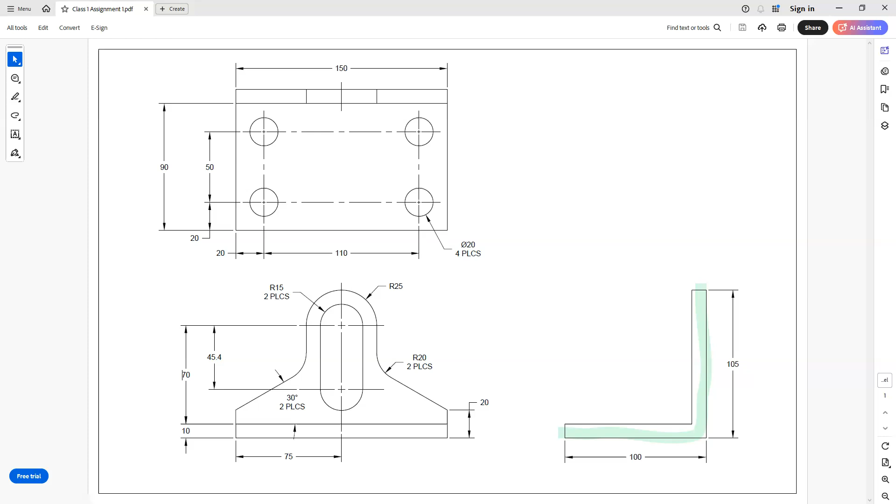Let's go ahead and change that to a yellow. But I'm going to create that whole entire shape there, and what that's going to do is leave me with having to remove basically a part of this, right?

And you can see this part that I'm tracing here. I'm going to have to come up with a way of removing that from here, and I'm going to have to do that on both sides. From most other programs, we're thinking mirror in order to do that, or we can create that sketch twice.

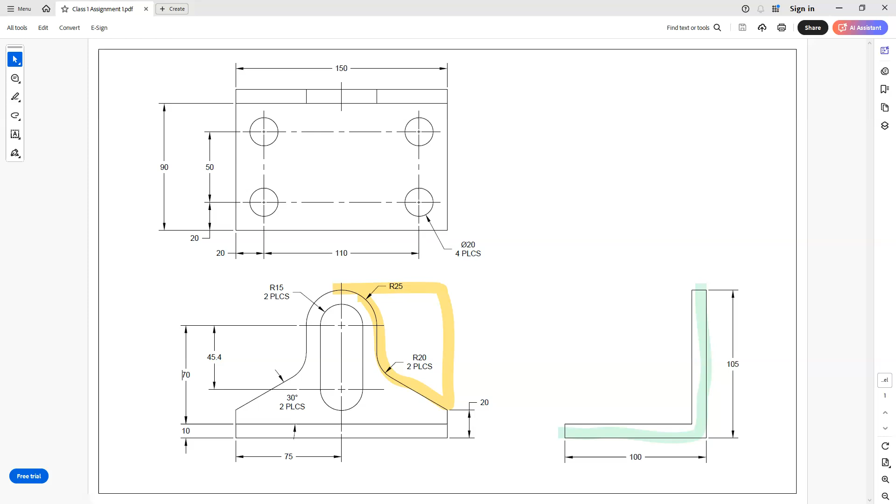So that's going to be one method that I'm going to do it. The second method that I'm going to do is I'm going to go ahead and take a look at this and say, hey, I already see that I can create this part here and just kind of stop it right here at this number.

So in the second half of the video, I'm going to create it using this method, and then I'm going to create this back half on top of it. So we're going to take a look at both different approaches.

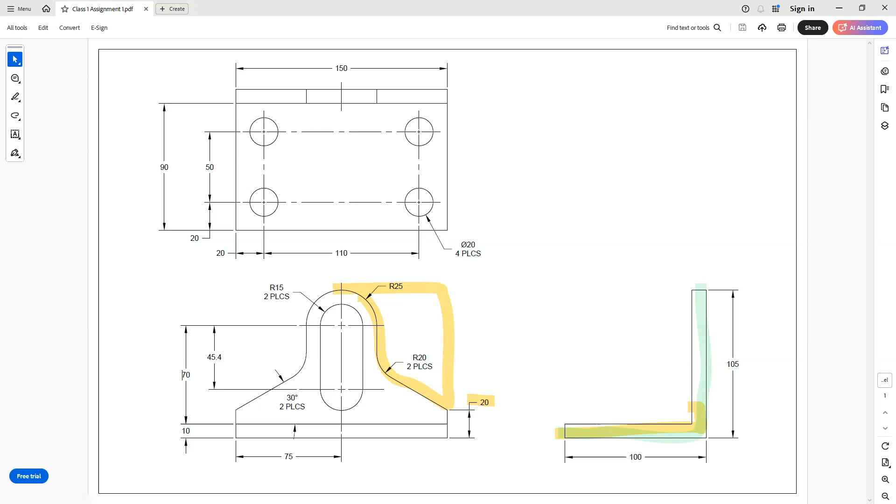Hopefully this shouldn't take us too long. It's just a couple of simple extrusions, but we'll walk through it here in Solidworks, and you can kind of see which one of these methods you would think of, or use to still create the exact same part. So let's jump over to Solidworks now.

Okay, so here in Solidworks, what I typically do is I'll usually click on the new button here, and then I'll go ahead and select a part. So I'm just going to go ahead and tell it that I want to create a part, and then I'll hit OK. Now with this, we do have to define what our units of measurement is going to be.

If you saw me do any of the Inventor videos, or if you're going to go take a look at that video, you're going to have to select what unit of measurement you're going to do before you get started. Here, I can select it after I get started.

Now I can also do that in Inventor as well, but in Inventor it kind of tells you to start off using millimeters or start off using inches, and here it's going to typically use the last units that you did before, but it's really super easy to change, and you're going to see that here in a second whenever it loads up and gets ready to work.

All right, so some of the normal stuff that you're going to see in both of these programs, or in any of the 3D programs, is you're going to have some kind of browser, which is located here. And you're going to have a ribbon along the top that's going to give you all of your commands and features and things of that nature to do. They all work exactly the same.

You're going to create a sketch, and then you're going to do something with that sketch. That's what you're going to see here in SolidWorks, no different than using Inventor. If you're using NX, exactly the same thing, or Creo is another program where you can see that as well.

If you wanted to change the units of measurement, or want to verify that the unit of measurement is the one you want, it's going to be here at the bottom, and from here you can select either millimeters, inches, or whatever you decide to use. In my case, I'm going to be using millimeters, grams, and seconds as my units for this.

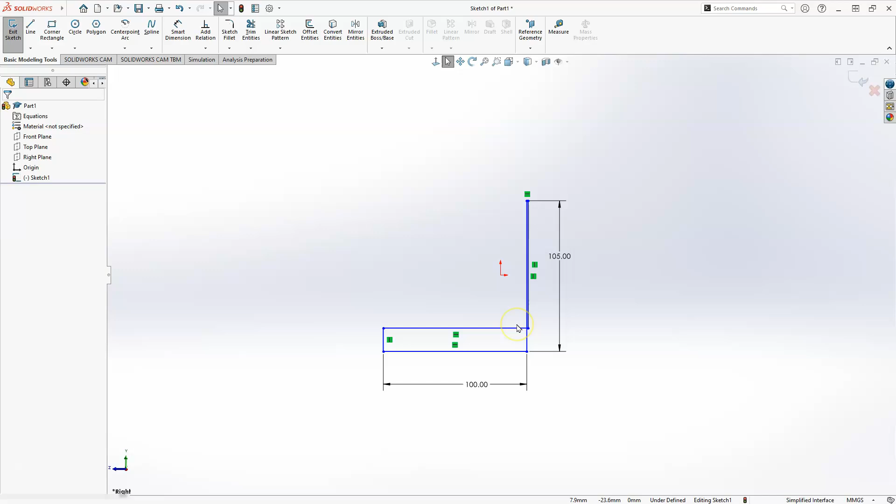So now you see that sometimes this will go a little weird on you. What I want you to do, if this does happen, is just grab this line. I'm going to left click and hold it, and then I'm just going to drag it to the other side here.

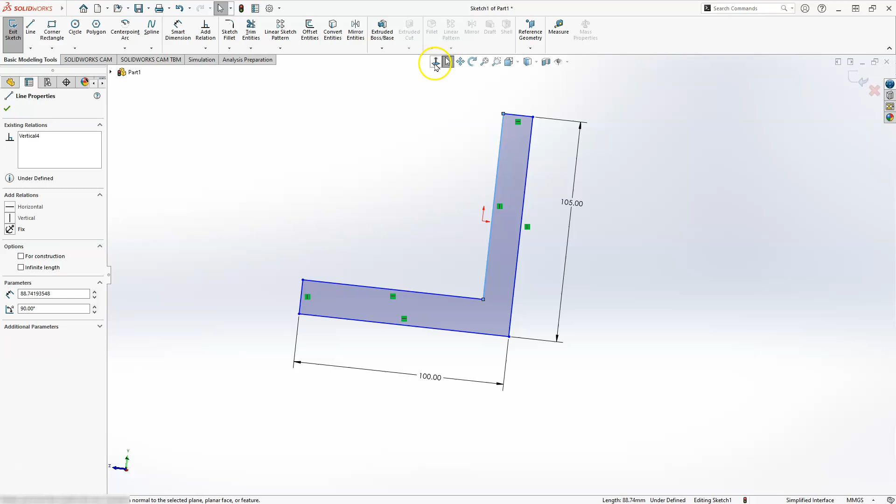Okay, let's go ahead and move this around a little bit. You can see that I was going to pan this over and I accidentally hit the middle mouse wheel button here. Another thing that you can do to get this back to the right orientation is go ahead and select the normal, and that's going to straighten it back out.

Okay, I have to do a couple more things here. I know that this distance here is going to be 10, right? So both of these two distances should be 10. Now I can set those two equal to each other, and the way that you're going to do that is...

Make sure that you're not in any command, so I'm hitting escape. I'll go ahead and select this line, hold down the shift button, and then I'll come and select this line. Once I select that line and stay on it for a little bit, you'll get some options here, so I can just tell it to make it equal. If this little box does not appear fast enough or it deletes, you'll still have those same options located here on the side. So if I select the equal here, it's going to set both of those equal to each other.

And I'll go back to my smart dimensioning. I'll select this line here, come to the side, do a left click, and then I'll type in the distance that I need this to be, which in our case is going to be 10.

All right, we just need a couple more things to put on here. Let's go ahead and hit escape. And what I mean by that is I want this line here, or this point, to be in line with the midpoint of this line, right?

So once again, make sure that you're not in any commands. I'm going to left click on that point, hold down the shift button, and then I'm going to come over here to this line until I find that midpoint. Once it highlights, you'll see I get the icon. Do a left click on that line. You can let go of the shift button. Remember, you're going to get that little icon to appear.

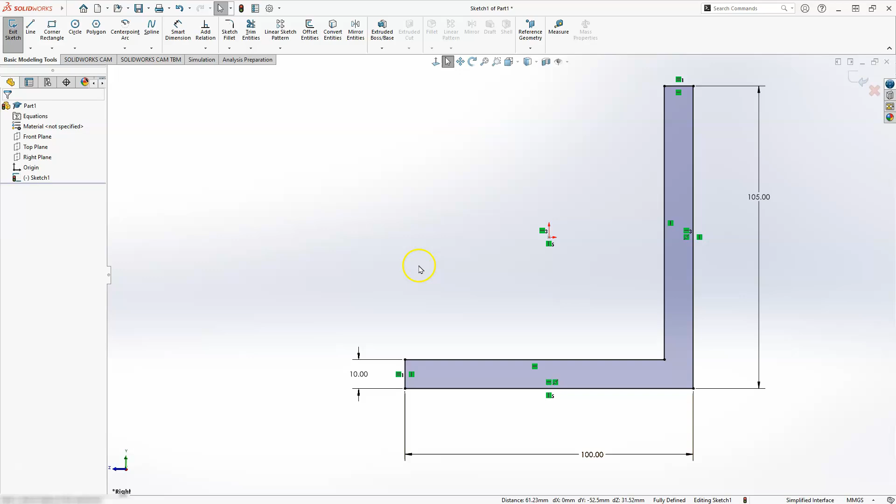And now if I look down here at the bottom, it says that it is fully defined, so my sketch is actually done and it's ready. At this point, I can either add some more stuff if I was doing more sketching, or you can do a right click and tell it that you want to exit the sketch function.

So you can either do it here or you can select here, either one is the same. So I hit exit the sketch. Once it's done, you can see my part. I'm just going to kind of give it a little rotation.

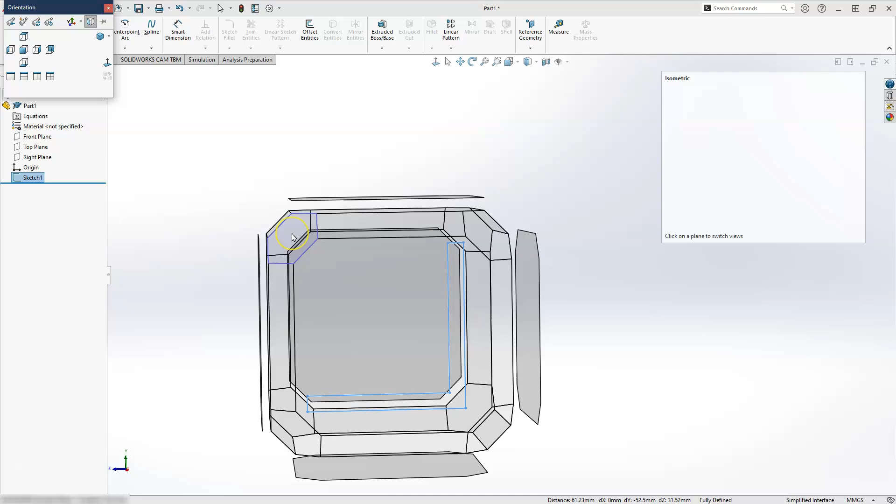Now another thing that you can do is you can also click the space bar. It's going to bring open this plane window here, and then I can select on this isometric here, right? So it'll rotate my shape in an isometric view.

And then from here, I'm going to extrude it, right? So I'm going to go to extrude, base, boss. I'm going to select here.

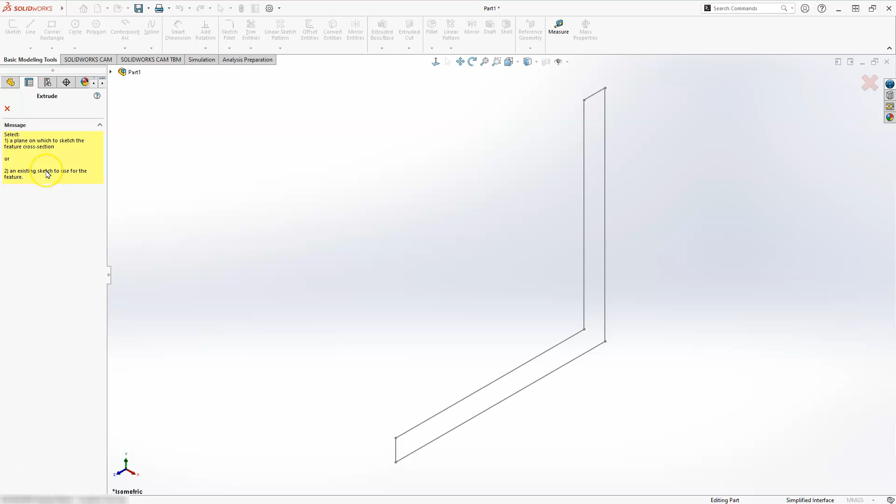Now it's asking me to select a plane or feature. Well, I have this sketch here. So once I select this sketch, SolidWorks should be able to find this and see that it is a closed sketch and say, that's what you want to extrude. Then I have to give it some characteristics of how I want this sketch to behave.

Do I want it to go in this direction, blind at a distance? I can add a second direction if I want it to go asymmetric, or if we want it to go symmetrically, there's a mid-plane option here, which is the one I'm going to choose. Then I'll give it the distance or depth, which in our case is going to be 150.

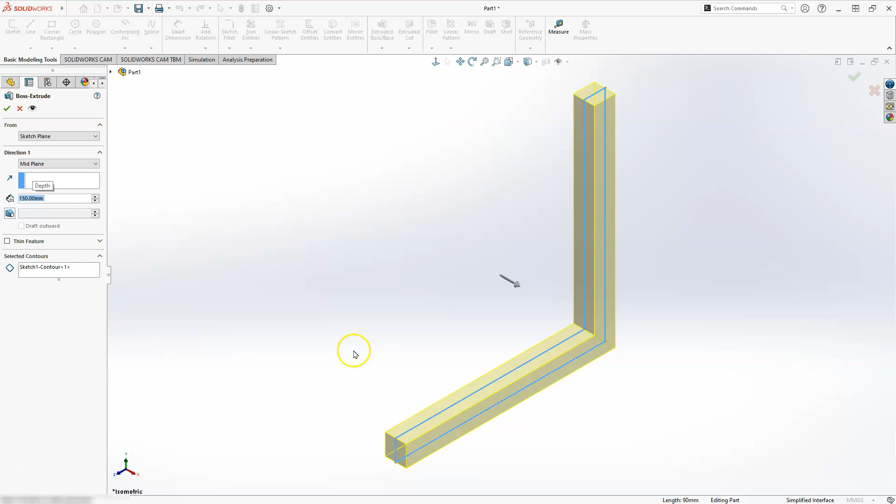Once I type that in, you should start seeing some kind of preview happening on my screen. If that's not the case, go ahead and hit enter, then it'll pop it up. Then we can either hit the check or OK here, or I can right click and do OK. All right, so there's my first piece that I've created with this.

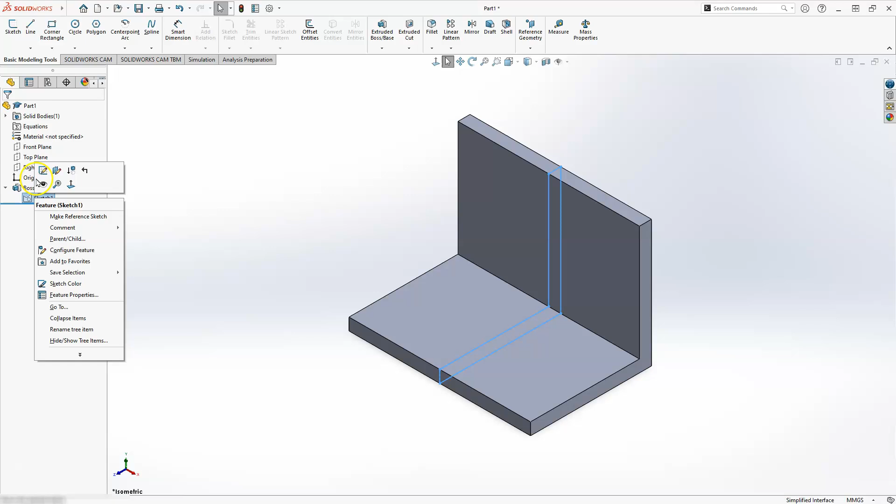I'm just going to do a left click anywhere on the screen, and that should get rid of or hide that sketch. If I wanted to edit that sketch, remember this applies to most 3D programs you'll use - that sketch still exists underneath. So we can always select this sketch, right click on it, and edit the sketch, which takes me back to where I can make changes.

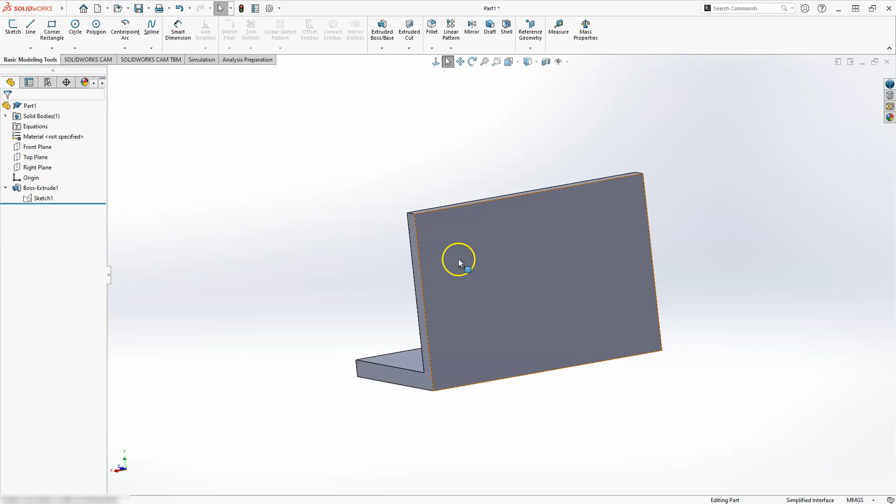I'm just going to rotate around here to get to the back of this. I'll do a left click here, and then choose this sketch option to create a sketch on it. I can also left click on that back plane and come up to the top and choose sketch. Either one of those methods will work.

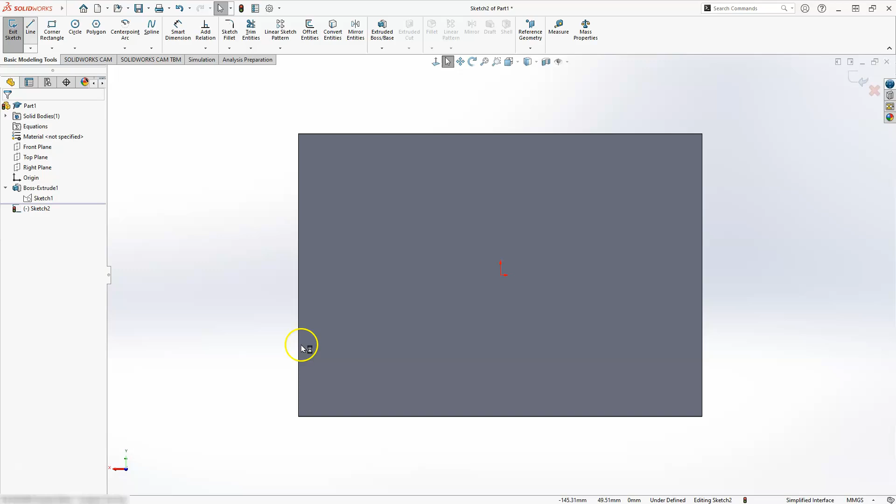Okay, so now I'm on the back of this. I just did a left click out here to clear that blue area. Then I'm going to start off by getting rid of that part that I didn't want. Remember I'm going to start by drawing a line - I'm going to touch somewhere along this edge, do a left click here, and give myself an angle.

Go here, go up here, and then I'm going to stop at that point. Next, I'm going to create - let's see if I can get away with doing just a regular 3-point arc here, so I'm going to go with a 3-point arc.

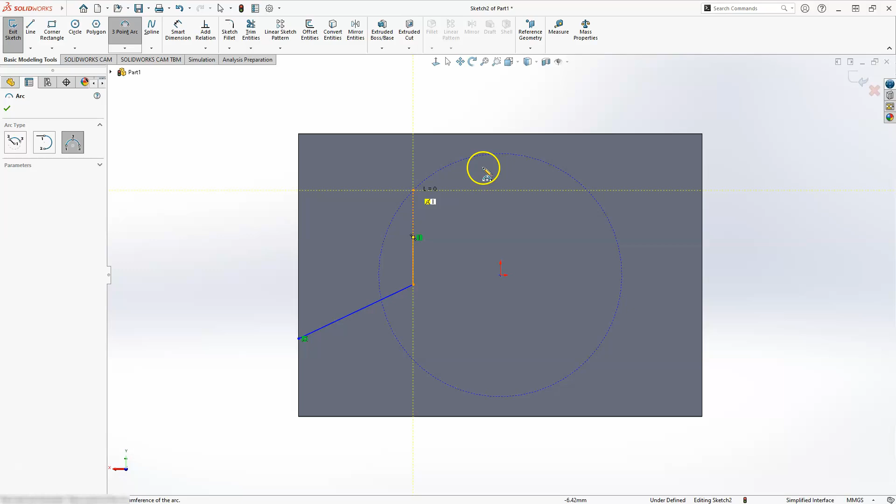One of the things you want to do is sometimes check over here to see what type of arc it's going to create. It also gives you the order of how you should be selecting your points. So I'm using a 3-point arc here - I'm going to select, here's my first point, my second point is somewhere here, and then my third one, I'm just going to click somewhere in here.

All right, go ahead and hit the escape button, now I'll hit it again. I'm just going to select this line, hold down the shift button, select my arc here. Once again, you should get a little box that appears and you can say tangent, or you can select the word tangent from over here in your relations.

All right, I'm going to do that one more time here at the top. I'm going to escape out of here, select this line, hold down the shift button, select this line here, and then use the tangent option that's located here.

All right, I'm going to add a few more dimensions onto here. I'm just going to go to the dimension, select this endpoint here and this bottom line, go ahead and place that dimension here. Tell it the height of here, which is going to be 20.

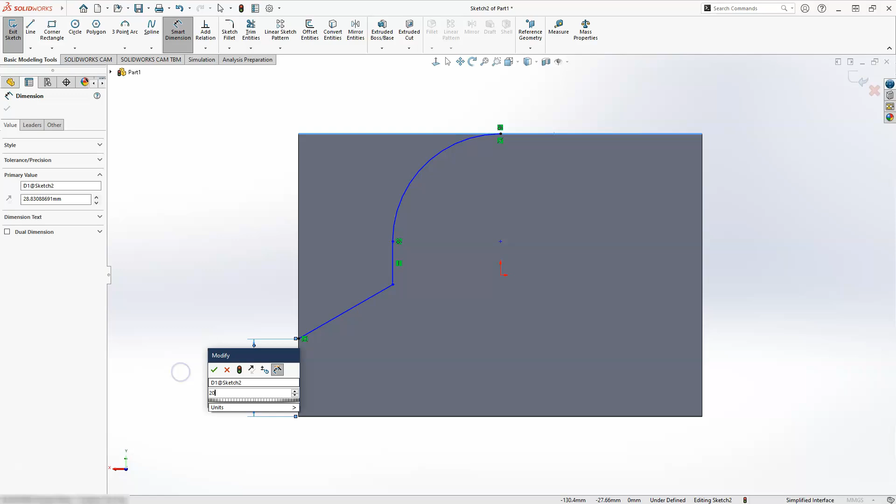Let's go ahead and do the angle that's located here. Go ahead and select this line, and then I'm going to select this line here, I'll do a click here, and type in the angle, which is going to be 30.

All right, go ahead and add another dimension. Let's see, we have a dimension that goes from this line here to this center point. Go ahead and place it here - it has a distance of 70.

I'm just trying to look over this and decide if I want to go ahead and put the fillet that's located here now, or do it with the actual command. We'll discuss the fillet command as a feature later, but for right now I'll go ahead and add it inside of this sketch.

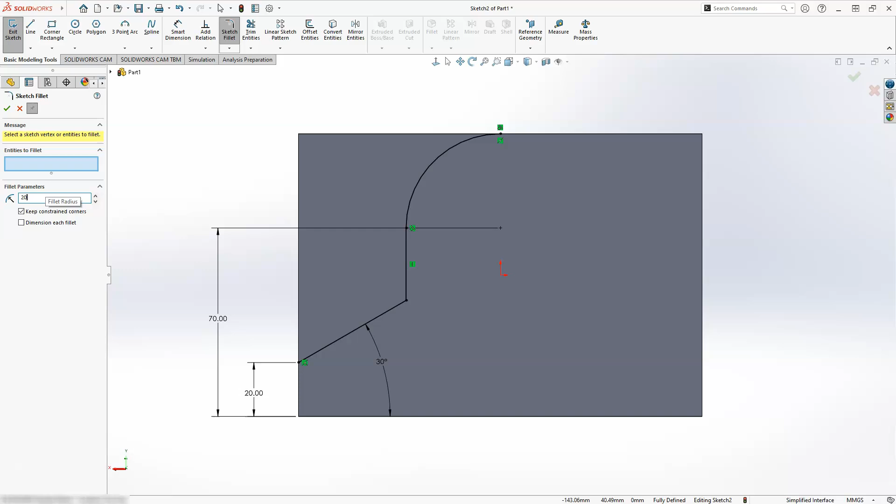I'll go to Sketch Fillet and type in the radius that I want. In our case, it's 20. I'll select this line here, and then this line. Go ahead and hit the check mark. It's good to go. All right, let's go ahead and add a couple more things here.

I'm going to draw a line from that point over to that point, and then a line from that point down to this point. Go ahead and hit the check mark. I think everything is fine with this. Let's go ahead and finish this sketch.

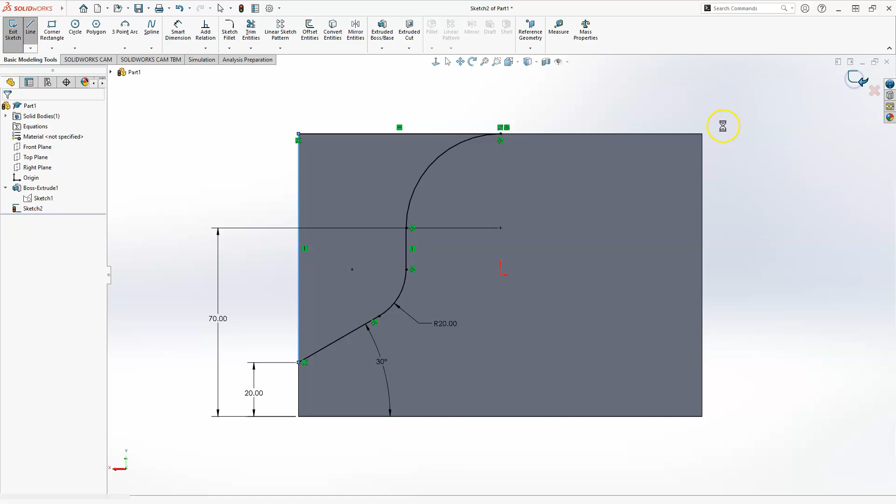And then we're going to send an extrude, this time not an extrude base, but we want to actually cut through this. So we're going to go with an extrude cut. I'm going to select the extrude cut. It should automatically pick that.

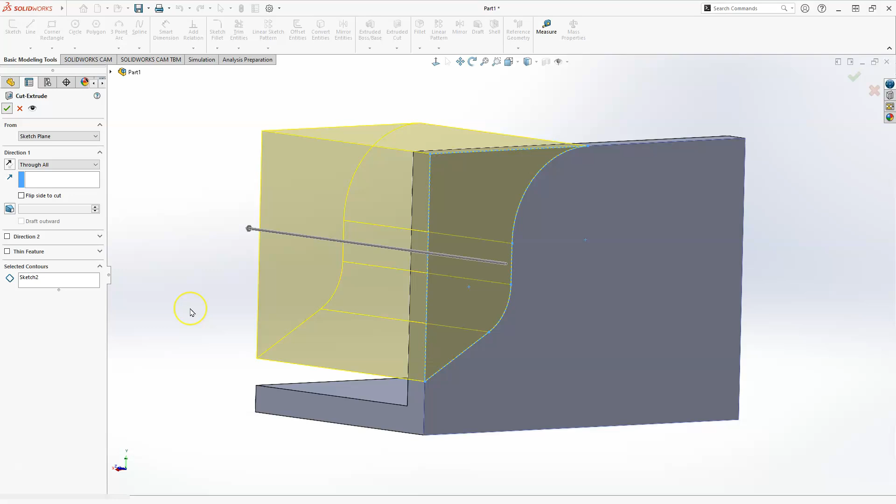Let me rotate this to the side to see that. Over here underneath the option, it already has the sketch plane. Do I want to send it blind, or do I want to give it a distance? I'm going to give it a distance of going through all. Once I select that, it's going to cut through that part. All I have to do now is hit the check mark, and it should take away that portion.

Now I can also mirror this to the other side. So here's another one of those commands, right? This is going to be a mirror feature. Now remember, anywhere from this line over, these are typically going to be features. And this side going that way is going to be kind of in your sketch properties.

So I want to use a mirror. Then it's going to ask what do I want to mirror. Let's jump back over to here. I want to mirror this cut, right? Oh, I actually stepped through that wrong. Let's go through this one more time. Let's go to mirror.

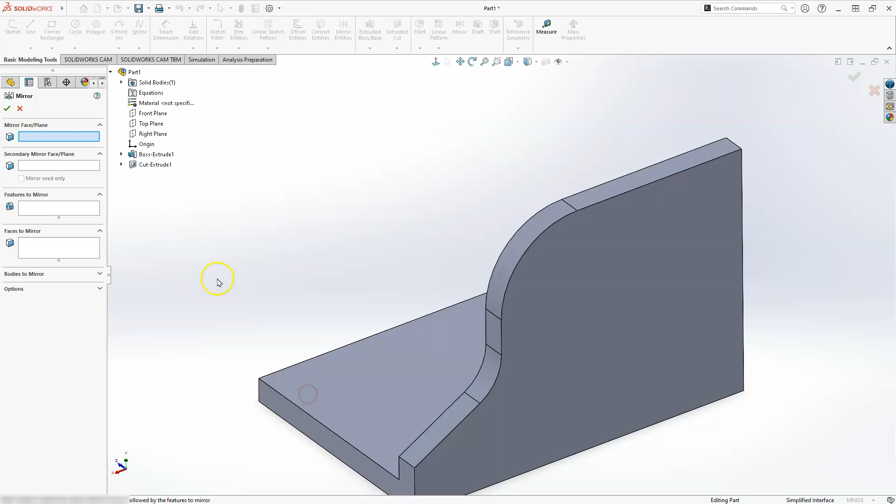I just misread it myself, I'm not even looking at it. It says go ahead and select the mirror face that I want to go through. In our case, we need to decide which one I'm going to go through. Let's rotate this down a little bit. Here's another one of those awesome reasons why I chose mid-plane in the beginning. You can see that this right plane is right in the middle of what I need.

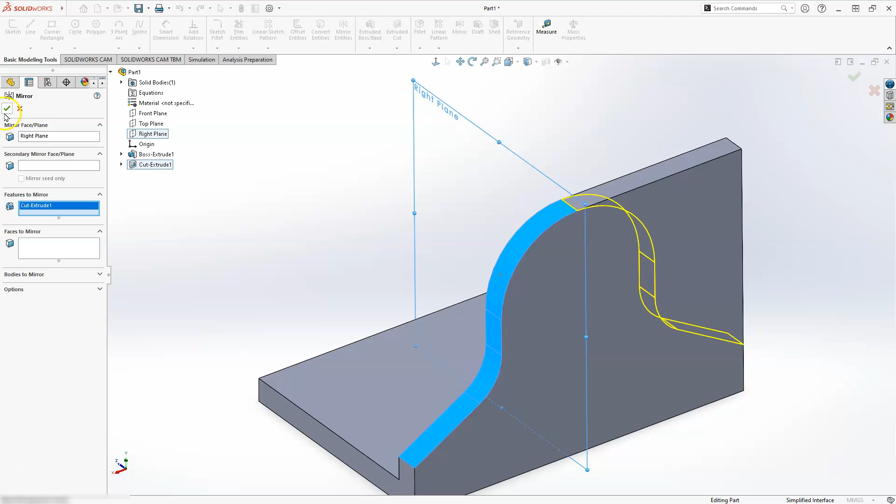So that's going to be my mirror plane. For features to mirror, I'm going to select here, and I want to mirror this cut. You see that it gives me that, showing the preview of it. Once I hit the OK button, it should automatically take that portion off.

All right, let's go ahead and draw this slot part that's in the back. Once again, I'm going to select this back face here. Then what I'm going to do is hit the normal button, and I'll create a sketch on it.

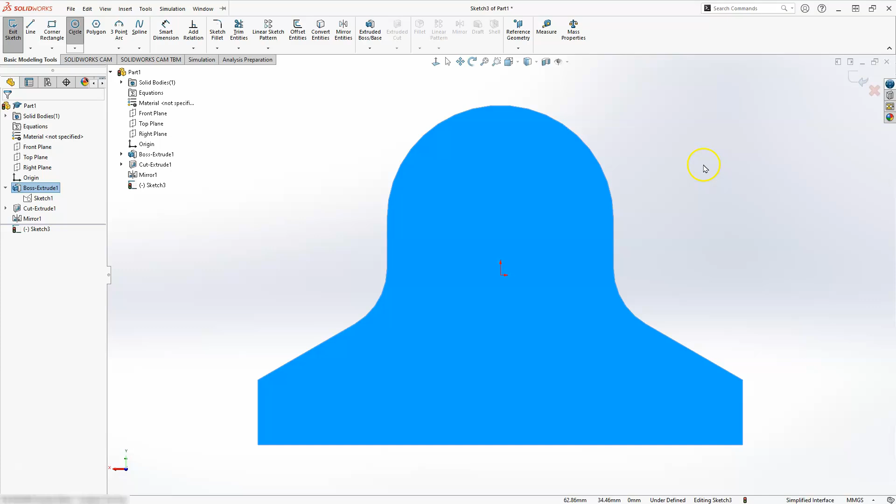Now I'm going to go ahead and create a circle. If this stays blue for you, go ahead and hit the escape button and click somewhere to the outside, and that will clear that blue face for you. I'm just going to go to a circle and find the center of here. I'm just kind of touching that circle, and it should give me the center of that somewhere.

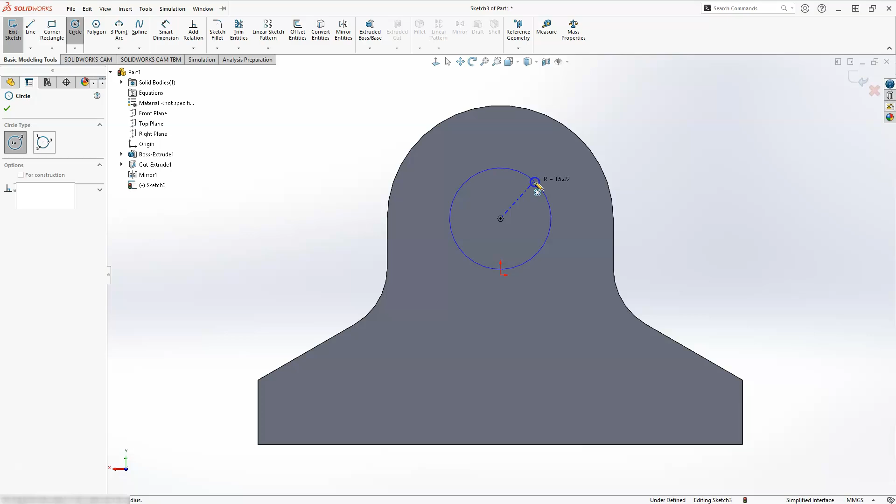There it is. Once it shows that center, I'm just going to do a left click on that center, and then I'll go ahead and click here. I'm going to place another circle here along the bottom. Let's go ahead and hit escape.

What I'm going to do next is select this center point, hold down the shift button, then select that center point, and I'll go ahead and use the vertical constraint. Let's click to the outside of my screen, hit escape, select that circle, hold down shift, select that circle, and make those two equal to each other.

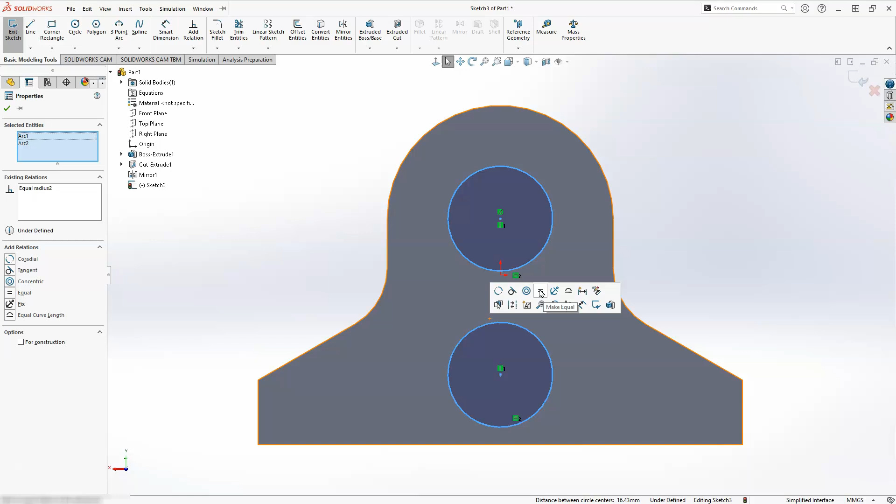Now you'll notice I didn't put a dimension on it yet. Let's add a couple more dimensions here. I'm going to add a dimension from here to here, and that should be 45.4. That'll give me that distance.

Let's escape out of here. I'm going to draw a vertical line using the line command, one going straight from here to here. Let's escape out of here and do another line on the other side.

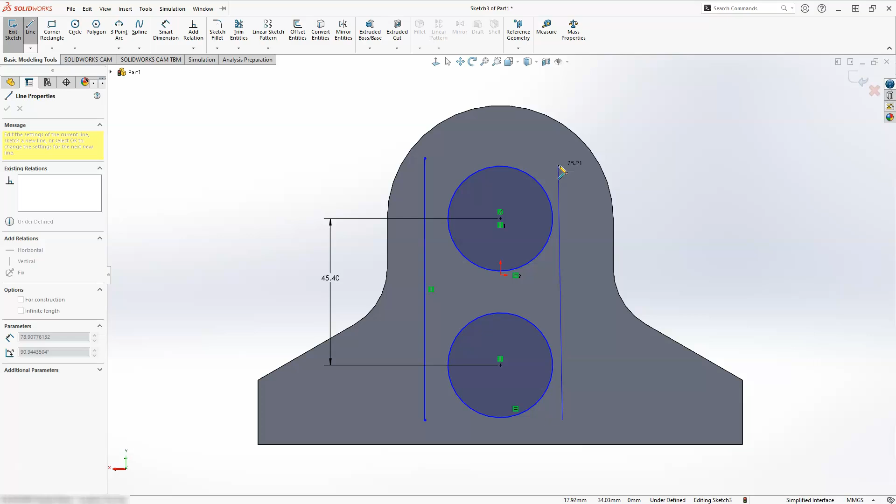I'm just going to set these two lines tangent to my circle. So remember, I'm selecting here, holding down the shift button, select this line here, and then select tangent. Let's escape out of here.

Do the exact same thing on the other side. Select here, hold down the shift button, select here, and then select the tangent option. Now you'll see sometimes I'll switch back and forth between selecting it from my little pop-up window or using the one that's over here in the browser.

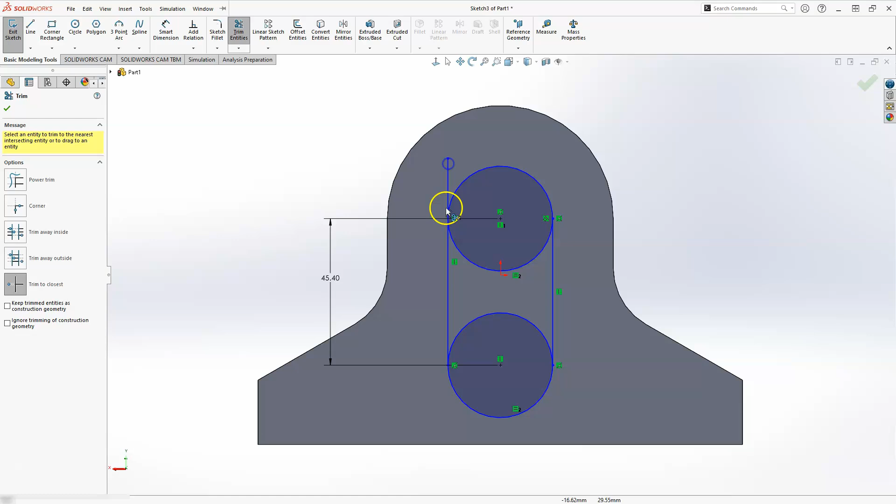Let's go ahead and do some trimming. So let's go to the trim, and then under the options I'm going to select trim to closest. I'll go ahead and trim off these portions here at the top, and then the circle part that's here at the bottom.

Let's escape out of that. We need one more dimension here. Let's go ahead and place a dimension. Select that arc here, go ahead and click here, and that has a radius of 15.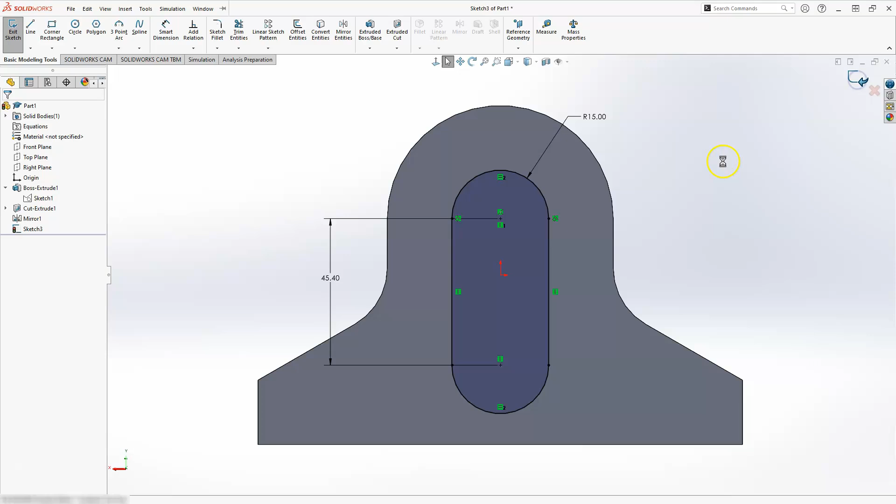All right, let's escape out of here. Looks like everything should be done. We can end the sketch. Just going to rotate this to the side. I'm going to choose an extruded cut.

It should be asking me what I want to cut. It automatically found it, so I'll just tell it to go through all, and go ahead and hit the OK button.

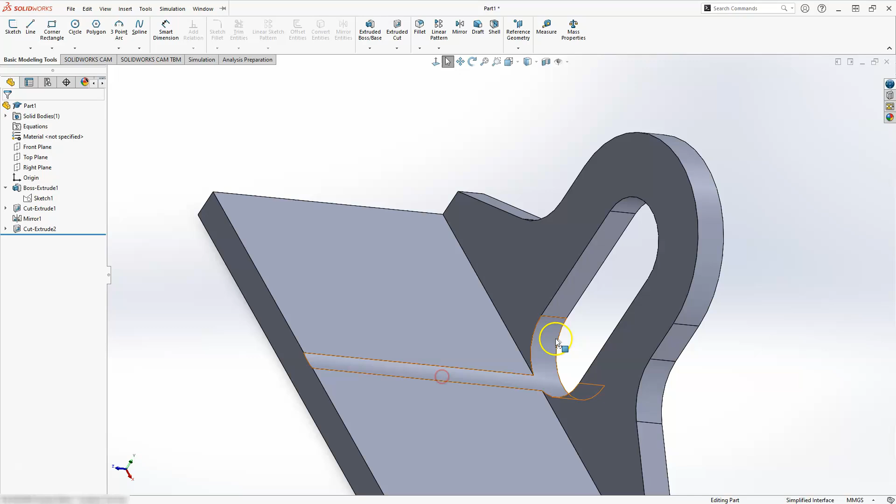And it looks like my part is a little bit too tall for it. Let's go back in and see exactly what I put wrong here. I think I already know what I did. I'm going to go back to the original sketch here—sorry, the second sketch.

Let's do a right click and edit this one. So I'm just going to select it and edit this sketch. And I know what I did—I actually did the 70 here. Let's go ahead and double click on this number, which is a really good problem you may run into. I forgot to add the 10 that's underneath that, so this number actually should be 80.

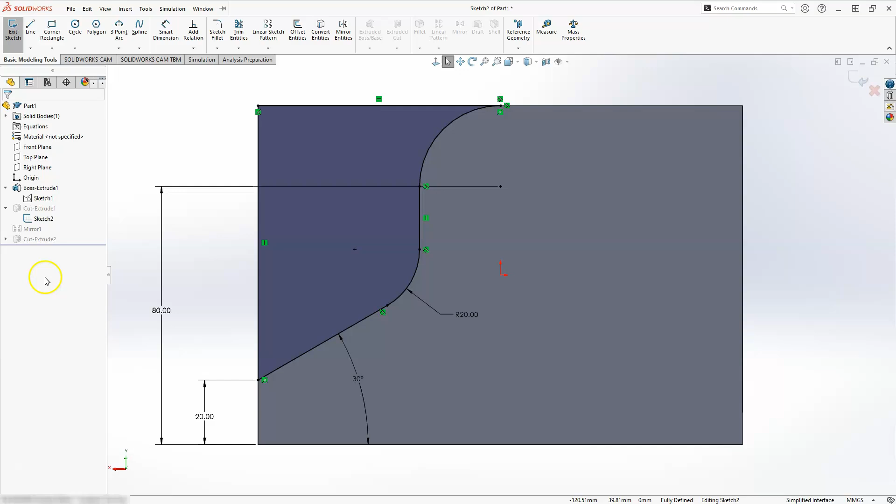Once I change that to 80, it's going to update all of the other stuff for us. Let's go ahead and hit this check, and then all of these parts should automatically step through and fix. So let's go ahead and finish this. That's fixed, and everything is fixed.

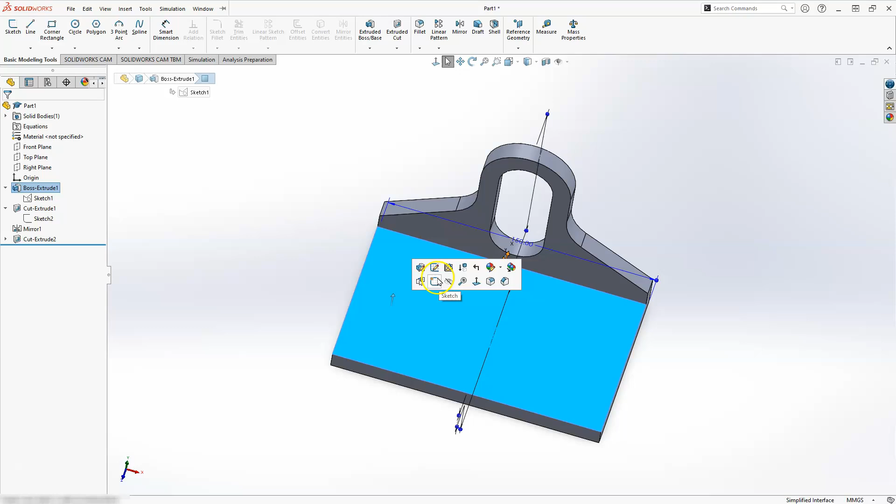Okay, let's go ahead and put this final piece on the bottom here. We have 4 holes that we need to go ahead and construct. So I'll go ahead and select here. I'm going to create a sketch on this bottom plane. Now this shouldn't take that long, we should be able to do this a little bit faster.

I'm just going to create 4 circles here. Doesn't matter the size of them, I'm just drawing 4 circles. Once again, I'm just kind of creating them. I can select, hold down the shift button, and keep selecting all of the other circles.

And we have one more to select. Then all I have to do is tell them that all of those are going to be equal to each other. So I'll select there. Let's escape out of here.

I'll select this center point, hold down the shift button and select this one. Once I let it go, just go ahead and tell them that those are going to be vertical. I like to click off of my screen here, hit the escape button, select that center, shift button, this one, let it go, vertical.

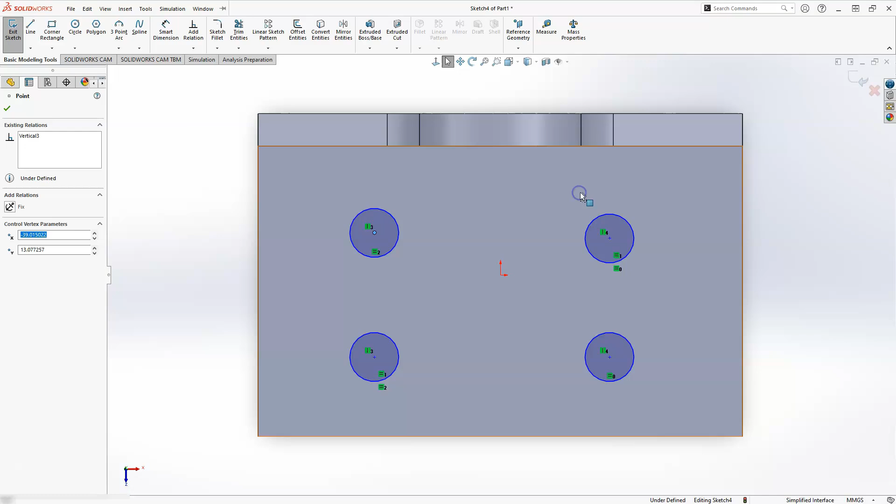Click here, hit escape. I'm going to select that, hold down the shift button, and select here. Make those horizontal.

Okay, good, it selected. Let's do this one at the bottom. I'm going to select here, hold down shift, and select here, then tell it that these need to be horizontal.

All right, let's go ahead and add a dimension here. It doesn't matter which of these circles I add it to, they're all the same. Remember, the diameter of this circle should be set to 20.

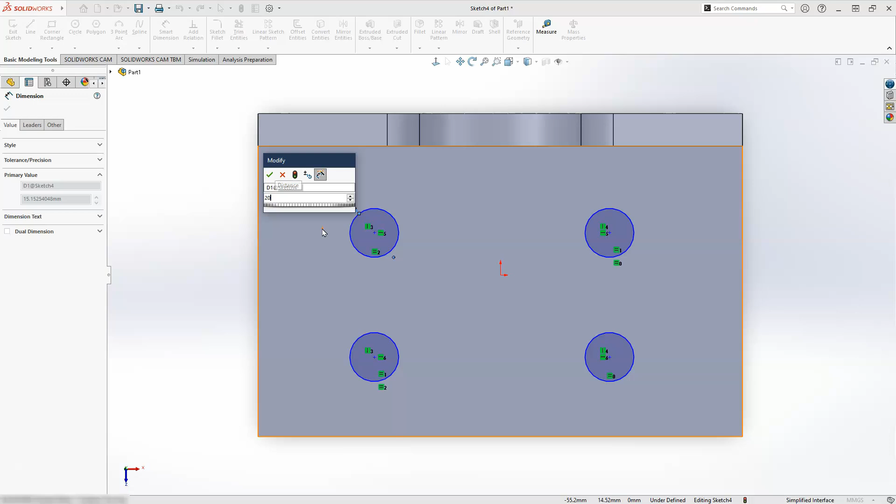Then we just need to place some dimensions on here. Let's do a dimension from that endpoint to here, place it, and then set that distance equal to 20.

Do the exact same thing here at the top. I'm going to select from that endpoint to this endpoint. I think it grabbed the bottom one there, so if it did, I'm just going to hit escape and get rid of that.

Let's escape out of here and come back to the smart dimension. Let's go find that center in this one. This distance here is 50.

Let's do a dimension from this line here to that point. This distance should be set to 20.

Let's escape out of here one more time. Now we have a dimension from that point to that point, and this number is set to 110.

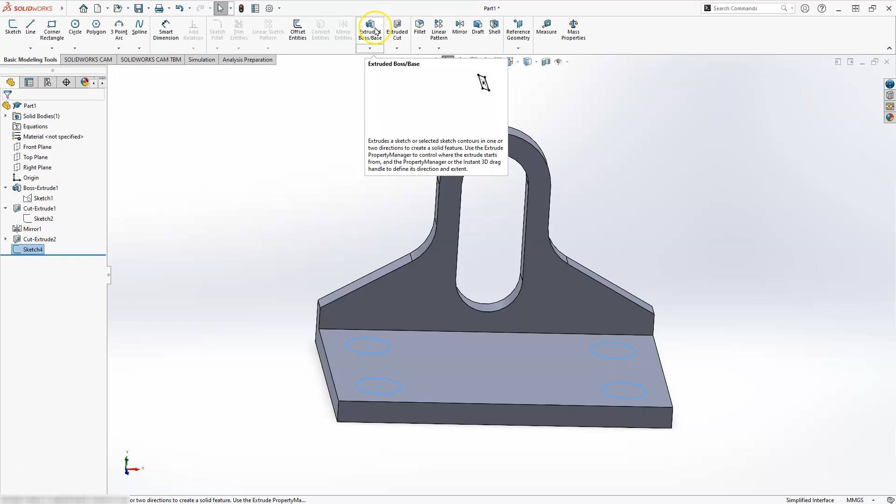It should be able to find those 4 holes, which it did. It's already set to go through all. Once I hit the check mark here, it should actually create that.

Let's do a click here, hit the space bar, and then let's go ahead and take a look at this in an isometric view.

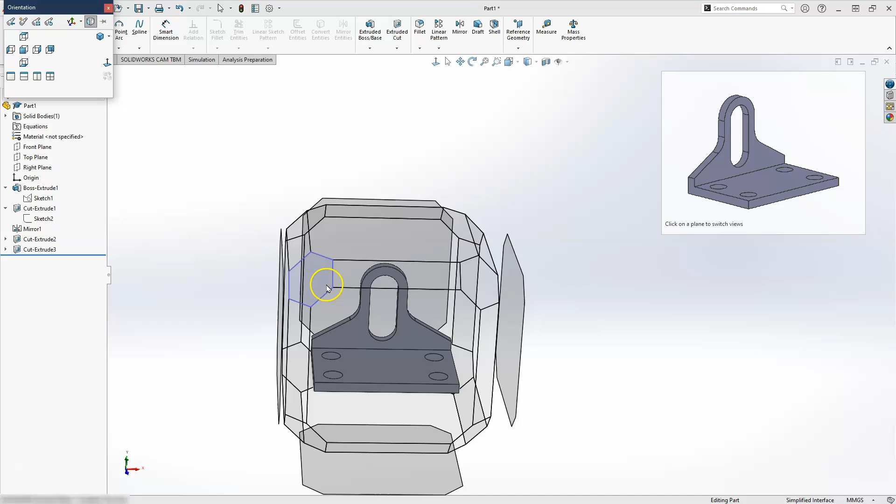All right, and there you have it. So there's our front view looking this way, our right side view, which looks that way, and then our top view looking down on it. So hopefully you understand this portion of it.

The next thing I'm going to do is create a new part like this one. I'm going to start by creating the bottom part of that if I looked at it the other way, and then we'll go from there. If you're understanding this part, the other one is just a different method of doing this.

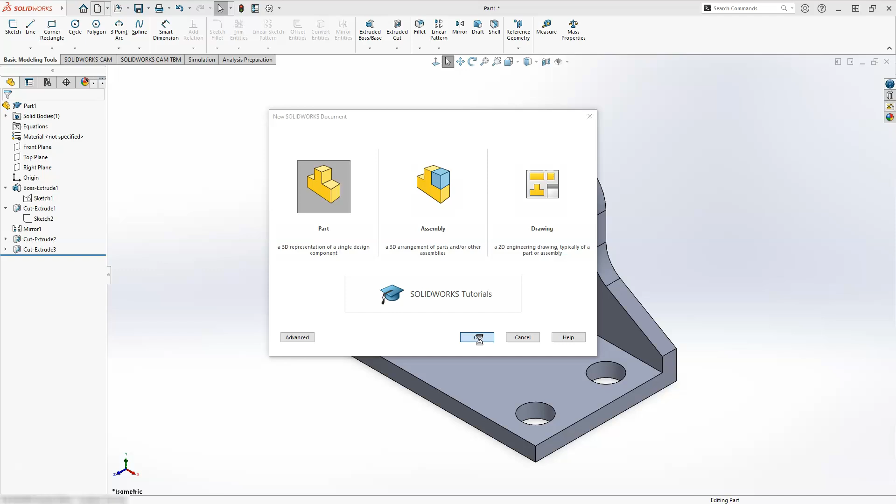All right, so I'm just going to click on the new one here, go to part, hit OK. This one I don't have to go through each and every step with you. I'm just going to do the quick part of it, and then we'll go ahead and create that sketch on it. I don't have to go as slow as I did on the introduction part of doing that.

So when I create the sketch here, all of this stuff is going to be kind of normal to you. I'm just going to go ahead and create this on the right plane, starting off by creating my sketch. I'll draw my lines here, and like I said with the other one, instead of creating it...

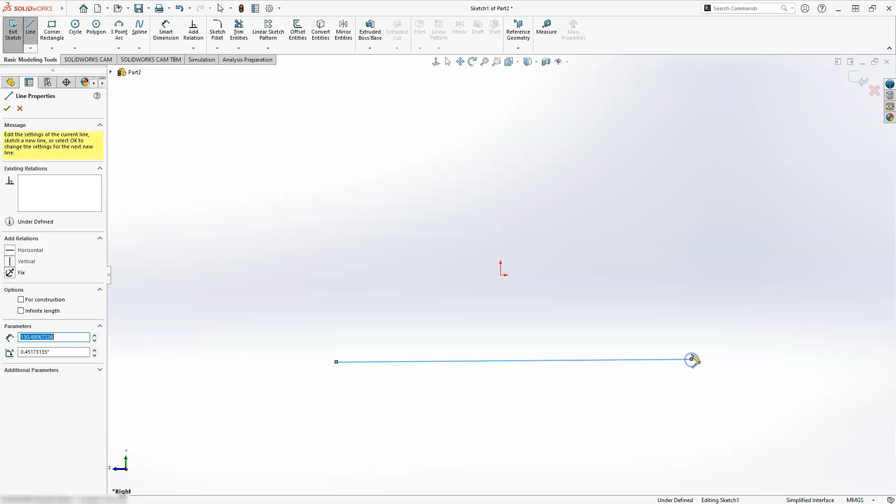Weird, and you can see that I actually drew that a little bit different. I'll straighten that up at the bottom here, which is some of those typical things that will happen. I have this line going down this way. You can see that this bottom line I actually kind of screwed up a little bit on.

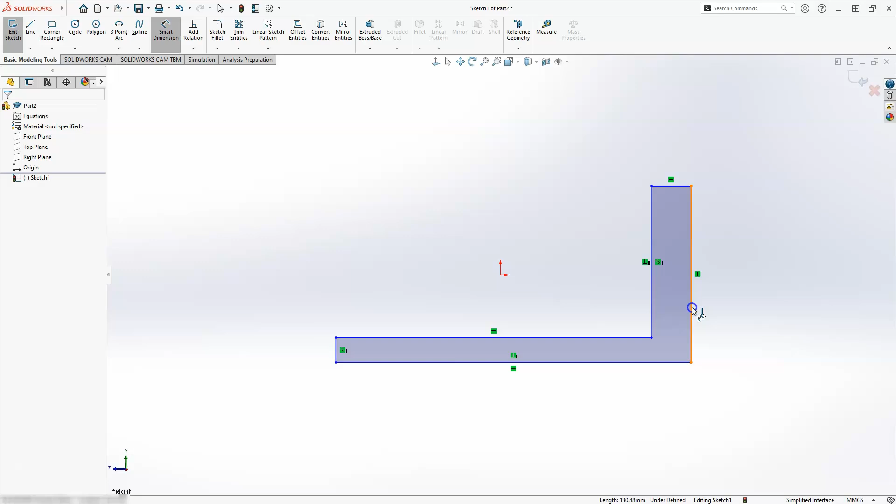Let's just go ahead and select that line, and tell it that it actually needs to be horizontal. Okay, let's go ahead and put our dimensions on here, using our smart dimension. We're going to place this one at a distance of 20.

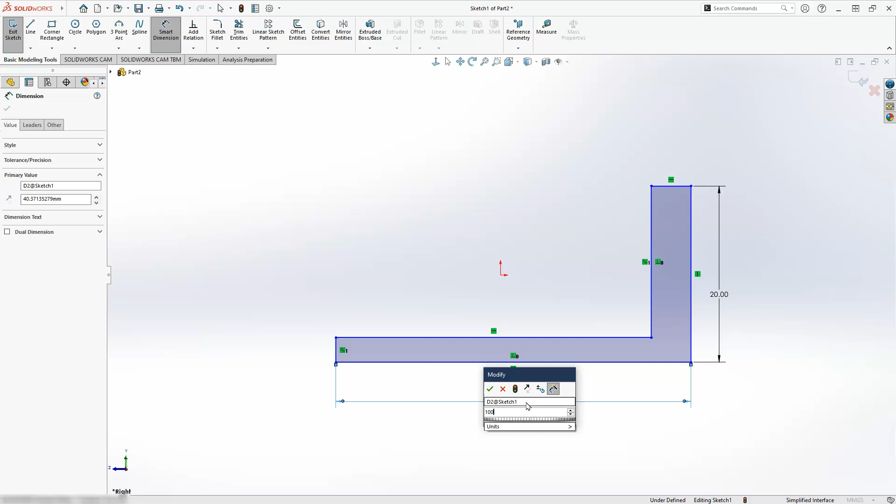And then we're going to go ahead and place our other dimension, which is going to be placed at, what is that, 100? I'll still do the same things I did before. Let me zoom out a little bit and you can see these two. Let's go ahead and put a couple more dimensions on here. Go ahead and place this at 10.

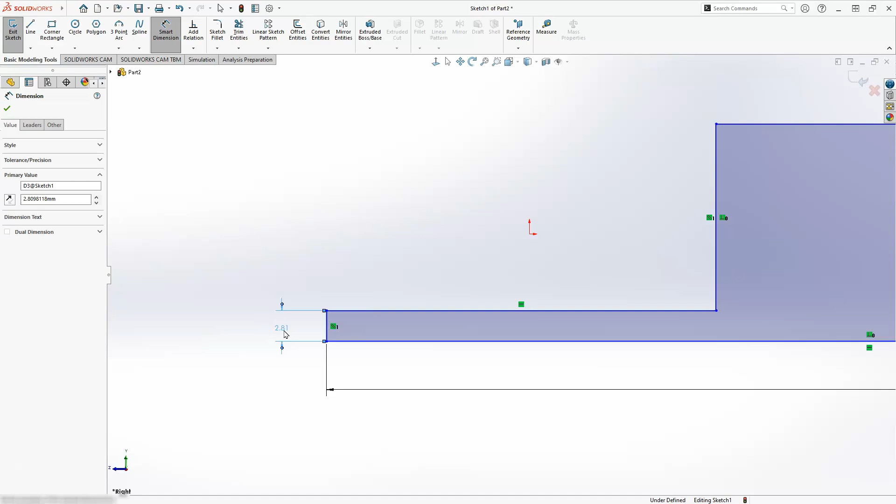And then we're going to go ahead and make it equal to the other one, just like we did before. So I'm just going to select this line here, hold down the shift button and select here. Now you'll notice another thing that I'm doing, and I'm not necessarily telling you, but typically after I do something I usually like to hit the escape button twice, and that just basically clears me out of anything I'm currently in. I'm going to find this midpoint, select it, hold down the shift button, go find that center point there, make it vertical.

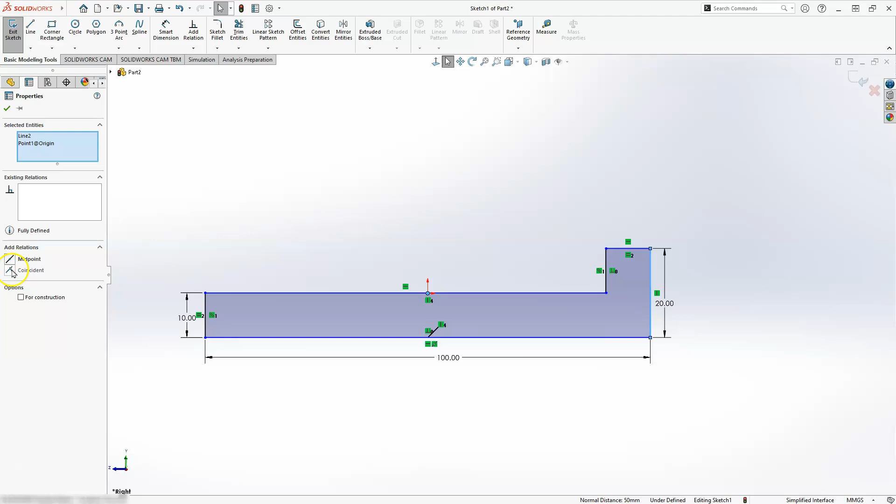The exact same thing needs to happen over here, so escape twice. Go and find that midpoint, which is located here. Hold down the shift button, go find it here. And then I think it grabbed the wrong midpoint. Let's go ahead and move this up or down. Sometimes it will do that, so it's easier to grab this and move it down. And then I can be able to find both of the points that I need.

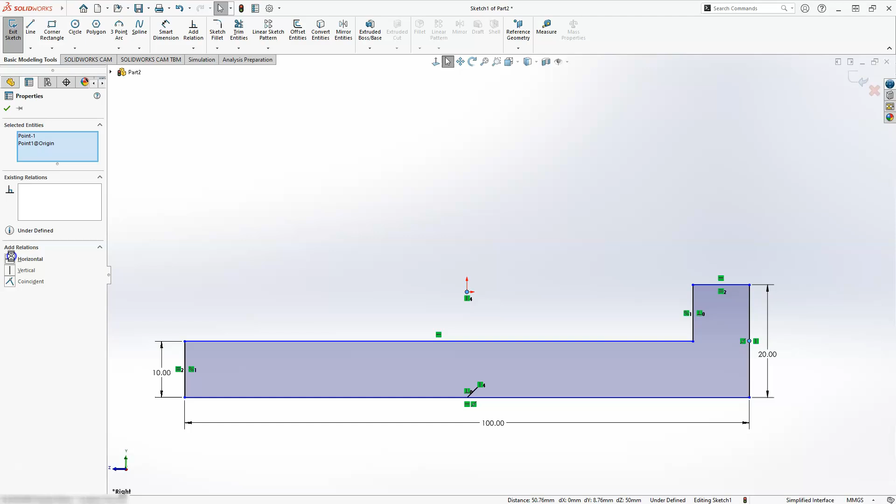So I'll go here, hold that one, hold down the shift button and select that point. There we go. And I'll make both of them horizontal. Perfect, everything is fully defined. I'll hit the right shift, and then go to edit sketch - when I say edit sketch, I meant finish sketch. Let's go ahead and finish this one.

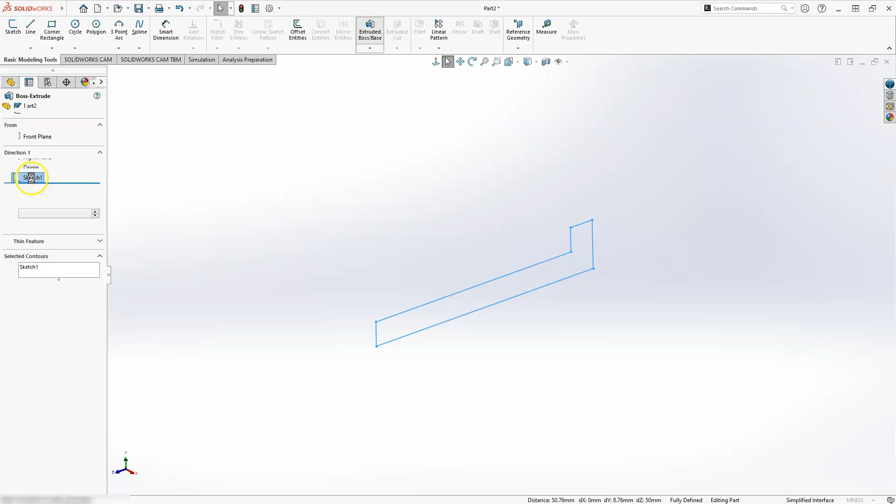Let's look at this. Let's go ahead and select the extrude boss base. You can see that I already had sketch 1 selected, so therefore it already picked it. Its overall dimension here should be 150. I'm going to hit the enter button. I'm going to hit the check mark here.

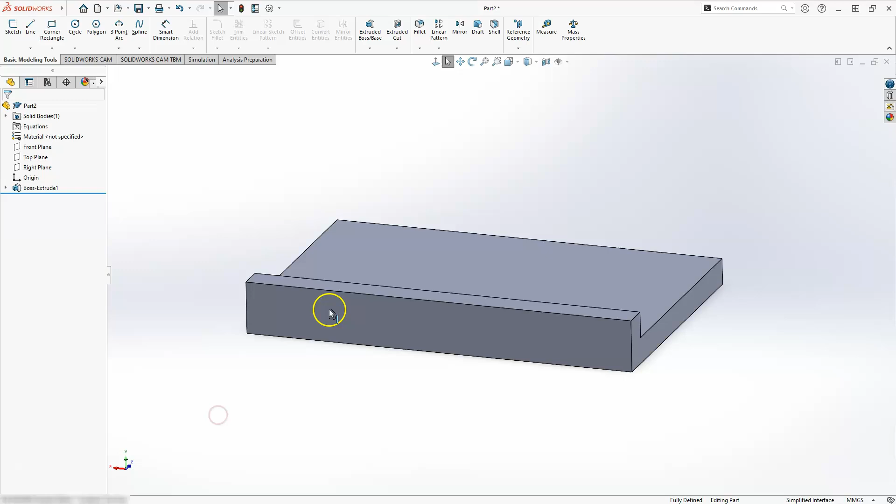Okay, let's go ahead and rotate around here to the back portion of here. Select here, go ahead and create a sketch on it. Now what I'm going to do is I'm going to bring in this bottom portion. So I'm going to select the convert entities, and then I'll select this face here, and it's going to select all and bring in all of that face. Go ahead and hit the check mark here. So now you can see all 4 of those lines are brought in.

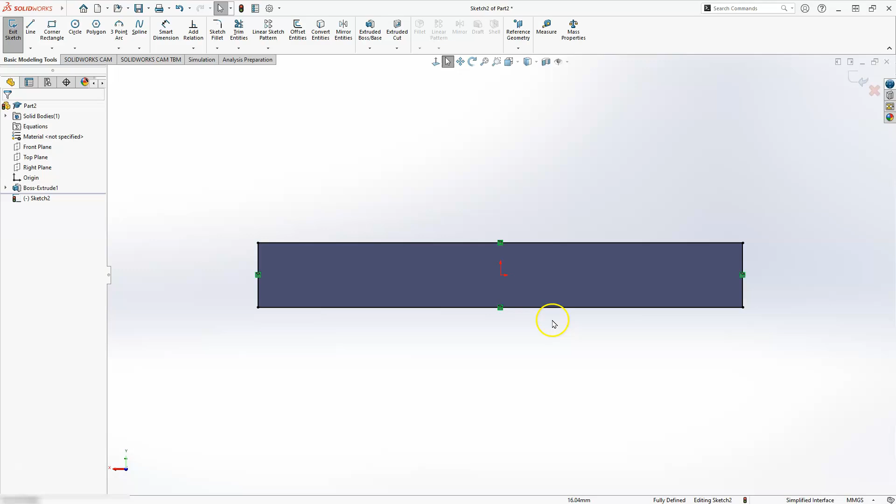I'll select this top line here, and then I'm going to select the construction geometry, right? So I want that to be part of this, but it's not part of it. From this point, I'll start off by finishing up the rest of the stuff I need to do. So I'll go ahead and draw a line here.

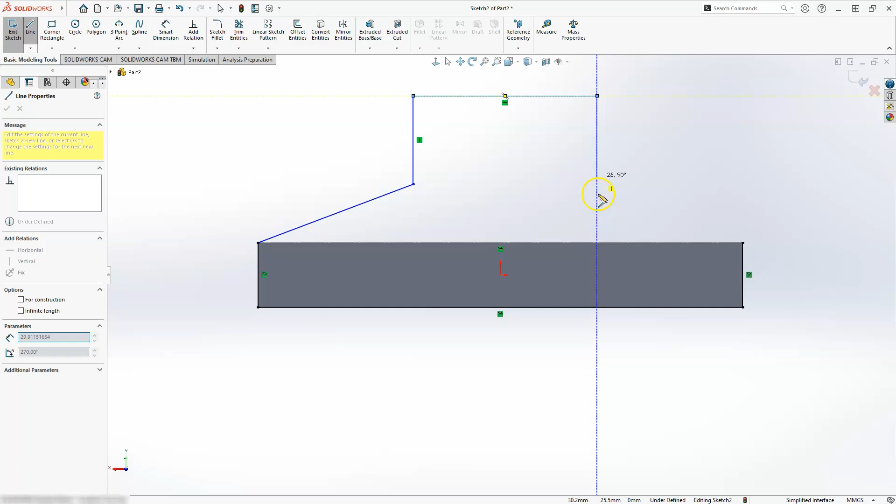We're going to send it off at an angle here. We'll go up from here. I'm just going to go straight across. Come down like here, and then I'll select here. Okay. Rotate this a little bit to the side so you can hopefully see it a little bit better.

Let's go ahead and put a few dimensions on here. So I'll smart dimension from here to here. Remember that has an angle of 30. I'll do the exact same thing on the other side.

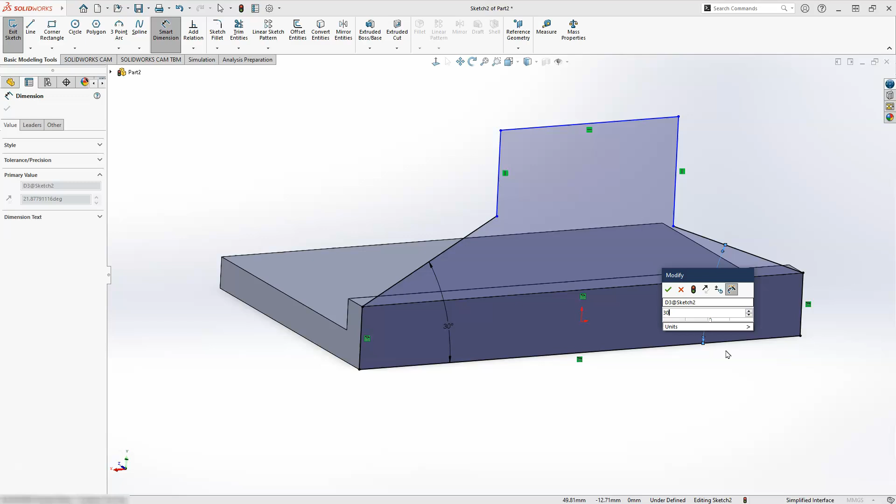And what are we going to do next here? Let's go ahead and set both of these lines equal to each other. That way it'll automatically center it. So I'll select this line, hold down the shift button, and select this other one. Once it gives me that option here to the side, I'm just going to set them equal to each other. And remember that if you want to rotate this back and normal to it, just select normal to.

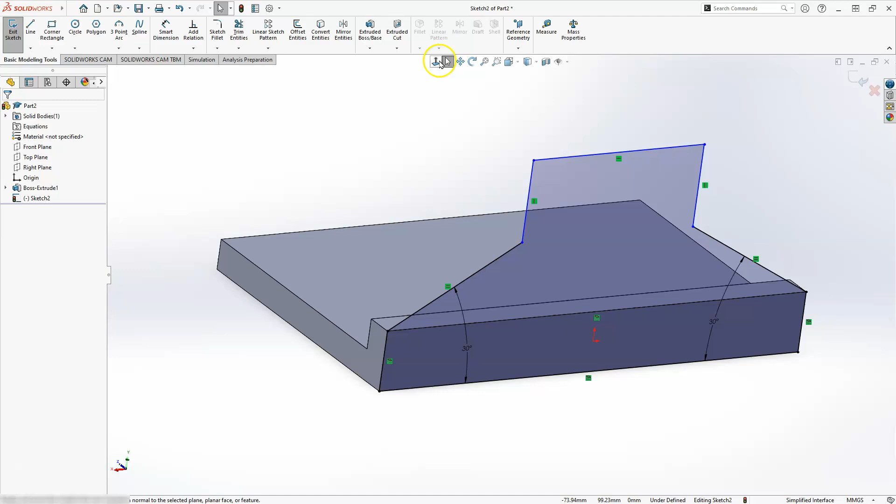Let's add a few more dimensions on here. So let's go with a dimension from this bottom line here to here. And I'll place it here. So this is once again going all the way from the bottom to this point. This is going to be 80.

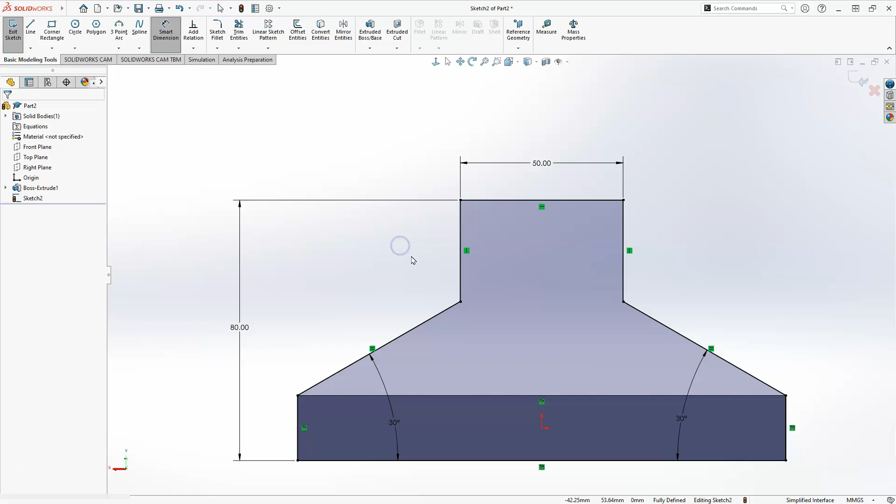Okay, so from this point, you can kind of leave it at this direction or whatever you want it to be, but I want to add that extra arc that's here at the top of this. So what I'm going to do here is I'm going to go ahead and add it into this sketch instead of making another one. I'm going to extend this up by 25, because that's going to be the radius of that. So 80 plus our 25 there should give me a distance of 105. So I'm just going to double click on this, and I'm going to change this number here to 105. It should extend this up.

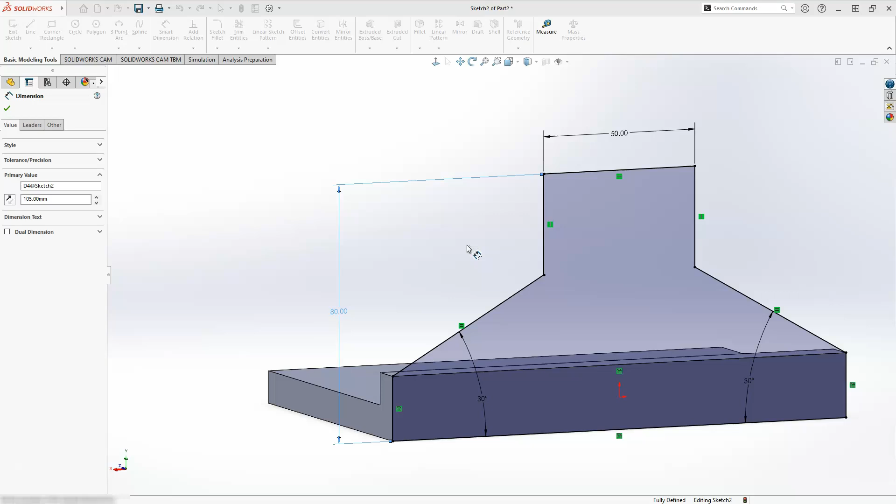Along the top of this, I'm going to go ahead and set those radii in there. Let's go ahead and go to Sketch Fillet here.

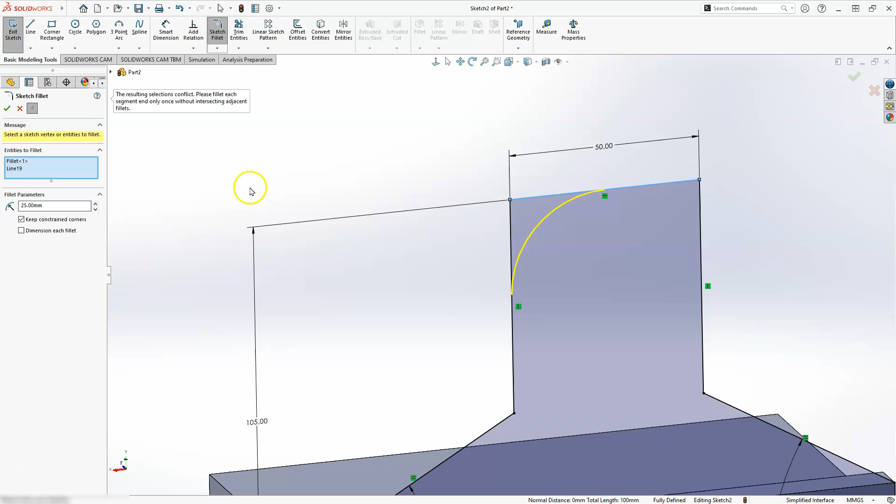I'm going to give it a number of 25. Select this line here and this one, as well as this line and this one. Sometimes it might not pick that one up, and if it doesn't, I'll take this off and use the regular fillet command instead. Let's see if it gives me a conflict here, we'll remove it and finish this sketch.

I'm going to exit the sketch and take a look at the boss. It should automatically pick this up, and I'll zoom back here in a second.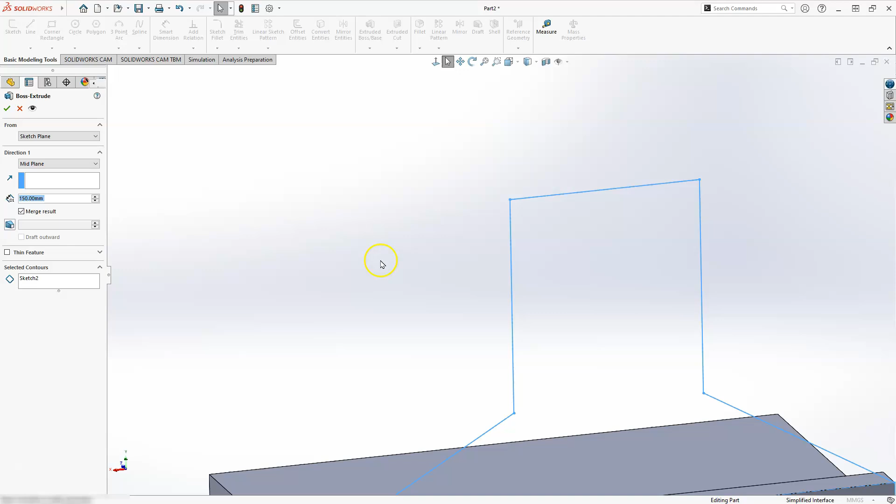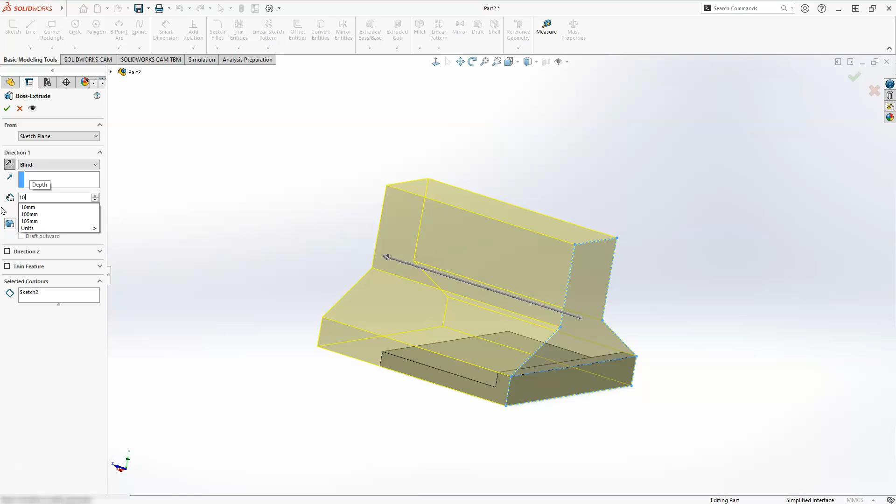I don't want it to be on mid-plane anymore, I want it on blind. I'm going to send it the other direction using this icon, then give it a distance set to 10. Make sure you're using the extrude boss, otherwise it will cut through your part. Once I hit the check mark here, it should automatically create that.

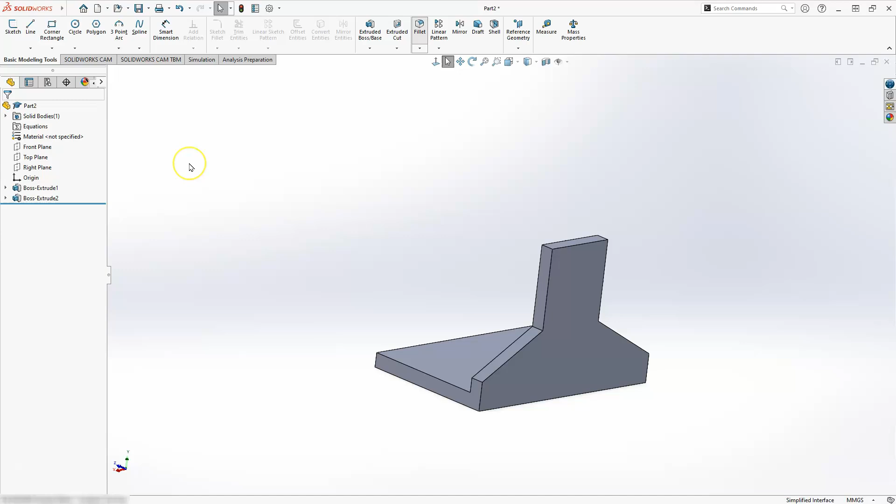Let's see if we can get this to work with the fillet command. So here's a fillet using the feature function. If I go here, I should be able to set this to 25.

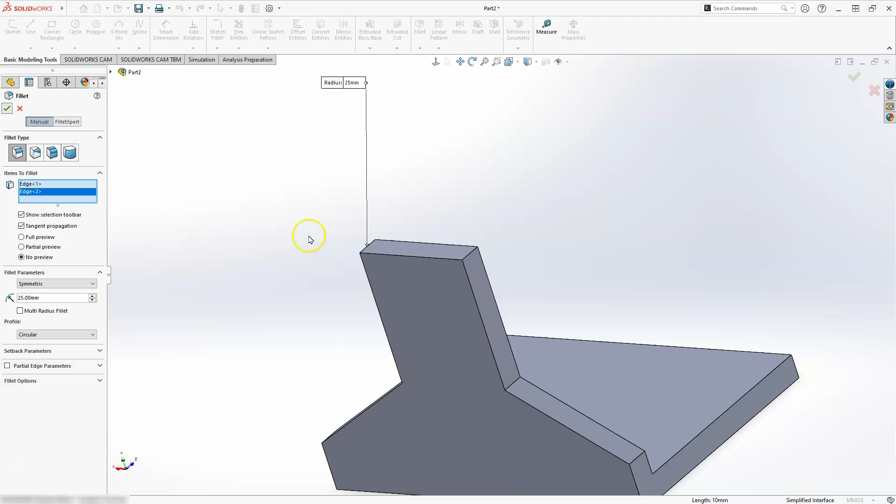I'm going to select that edge, and then that edge, and then let's go ahead and hit the OK button. Now you can see that it did pick it up.

It's kind of one of those strange things, I don't know why it did not pick it up when I did it inside of the sketch, but either way it doesn't really matter. The rest of this will be the exact same steps you've seen me do in the previous stuff, so I'll speed through this, or you can refer back to that, and then we'll come back and wrap this all up.

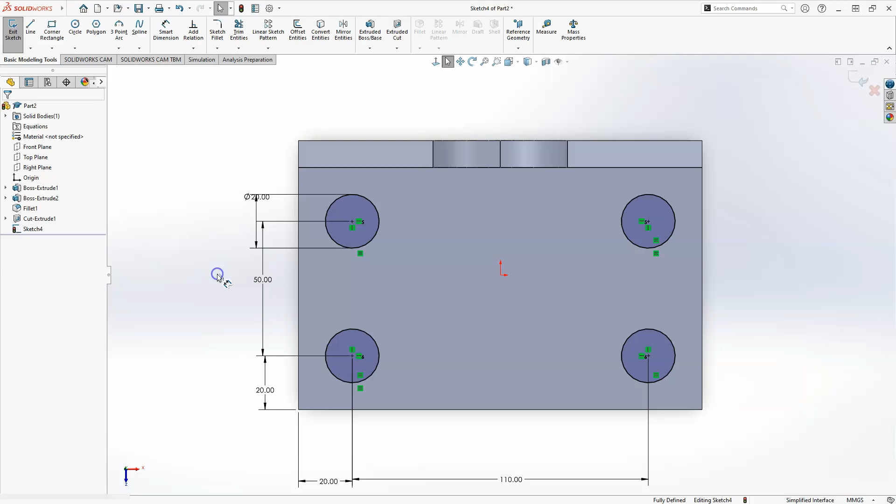Okay, so hopefully you like this comparison between both different methods. Let's see if we can put them side by side here. It actually kicked it over to my other screen here, but hopefully you enjoyed watching both of these.

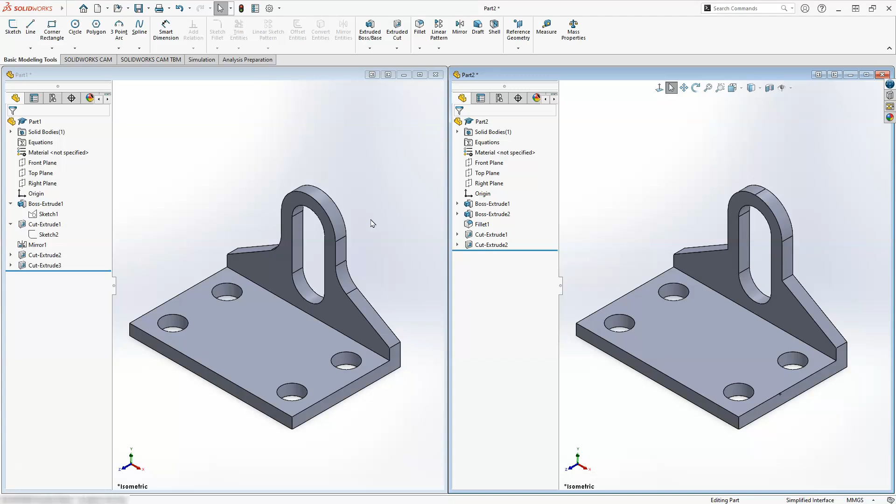No matter which method you choose to do, they're all going to work the same out for you. It's just a matter of your perception or however you start on that. Just remember, whichever way you start with, you can get to the same solution by doing either step. And you can see on this one, I actually forgot to do the fillets here, and I just noticed that.

I'm just going to add them on here real quick. So I have this selected. That distance is what, 20?

Do apologize for doing this a little bit late in the video, but there we go. I'm sure if I hadn't done this, somebody would have left me a good comment below, but there you go—there's a good comparison of doing them.

So it doesn't matter which way you start off, it's just that we're getting to the same solution. You can see by looking at the browsers, each of the steps are almost the same. I'm not going to say which one is better than the other—it's just whichever way you decide to do this.